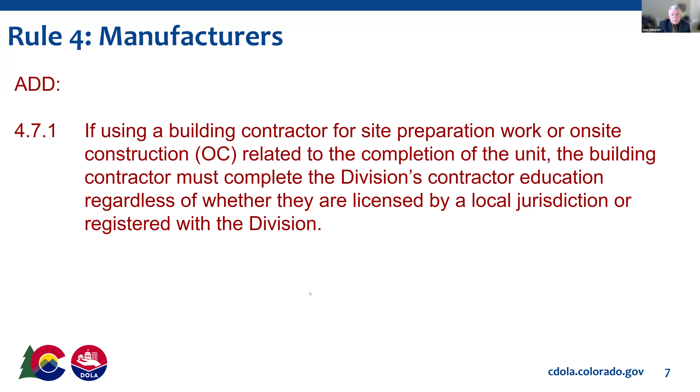And this will tie back to the responsible parties section also. Now, as promised, I've worked on some of the enforcement rules also, and so we're rolling these out for the first time also.

We've heard over the past few years that the process was not very clear on how this worked. We've also talked to our Attorney General representative, and they recommended adding some clarifying language, and we hope this makes sense to everybody.

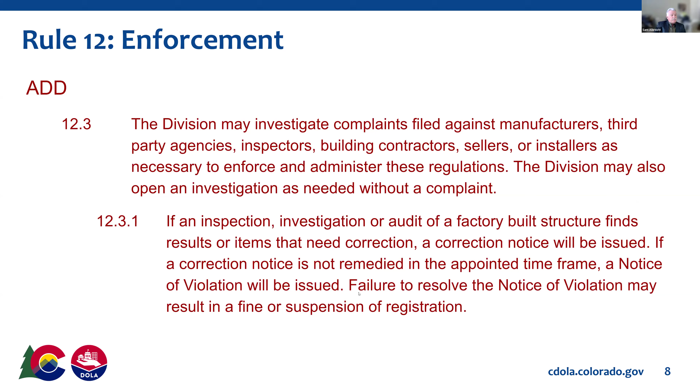So a little bit of a repeat, but if you go back to the 12.3.1 rule, this is really talking about an inspection, investigation, or audit of a factory-built structure. And then we talk about the plan review or screening, and this captures all the registered parties that we have in our program. And then if that corrective action is not remedied, then we look at taking it to the next level.

And that's really all the updated rules we have going into the next round of red lines. Any questions on what I've talked about so far? All right, thank you.

So other updates. We held a manufacturer's webinar on, oh my gosh, what was that date? January 20th, I believe. What we did there was we kind of rolled out what we were thinking with the regional design criteria or the design criteria regions and started asking some questions. We had pretty good attendance. I don't remember the actual number, but it was in the 40 or 50 range. And then we followed up with a survey right after that to every manufacturer email in our database.

We were asking questions about how does this layout look to you? Are there any price breaks we need to know about? What's going to be your cost update? Do you have any concerns about updating the 2024 code set? We also asked a question about Class A shingles on roofing. Anyway, a whole series of questions. We got 9 responses back.

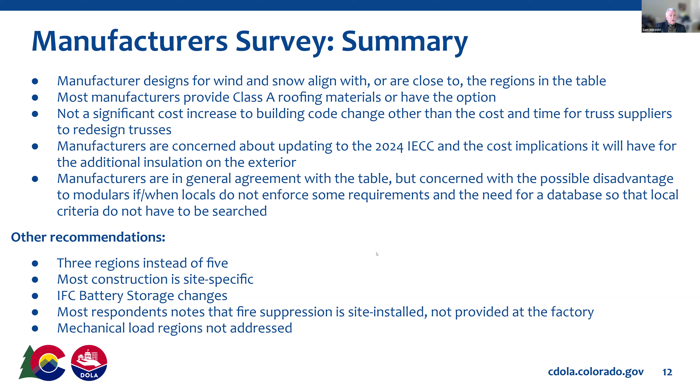All right, so as we work on Tracy's question, or her calling back in to get the question again, we'll keep moving. So thank you all for that discussion, and like I said, I appreciate the manufacturer's input on that. So let's jump into the design criteria regions.

Sean, you put a question in the chat too: would a factory be able to submit original plans with optional or alternate kitchens, bedrooms, and baths so they can be built without resubmission? That is not something we have discussed yet, but if you want to come online and talk a little bit about that, that would be worthwhile.

I would assume that the structural loads would all be the same, regardless of where they're going through, but that might be a possibility. I don't want to commit to it till we've had some thought about it.

Yeah, well, I mean, a lot of times the factory will design a floor plan and they'll have like a...

Can you hear me, Sam? Yeah Tracy, I can hear you, Sean. Tracy, I had to mute you again, this time we were getting nothing but echoes. So if you've got two devices logged in, you may have to mute one of those devices because we're picking up echoes.

Go ahead, Sean. Yeah, well, factories a lot of times will design a home that has a master bath that's very basic, and then they'll have an alternate, maybe a 5-piece bath with double vanities and stuff like that. And then they'll have maybe an alternate kitchen with a different island, or they'll offer it with a 3-bedroom and then make some slight modifications as a 4-bedroom by maybe making a family room into a 4th bedroom.

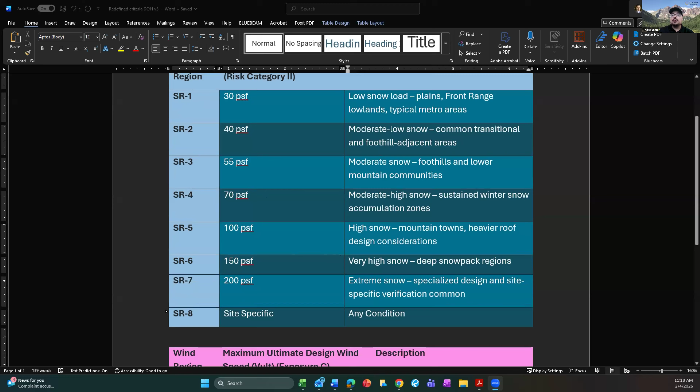So we developed this model that would capture more of that, just solely based on the data inputs that we received. We also then representatively created a second model for wind, in which we had 4 categories. Again, this was just to take what we got in terms of data capture, which was an imperfect model.

There's still a lot of the state that did not respond to the survey, and a lot more information to be gotten. But generally, I believe they're representative of a lot of the numbers we would anticipate, and a lot of what Donnie's research has already shown, and a lot of what came out of our meeting with ASCE with Jeanette Torrance about her expectations regarding the data we'd be getting back. So based on this, we wanted to present this to say, hey, we are thinking about other models.

We've been thinking about some of the ways we might categorize this information or use different stopping and starting points. If this is of interest, we can pass that along. I wanted to make sure we talked about this with the context it needed, instead of just being in the packet and presented as a separate model. So I'll stop the share there and go back to a bit more of the general context of why we created this.

One of the things you saw there was the wind region and snow region broken up as two separate tables with separate coding systems, again to address that issue of administrative feasibility. That has actually been adopted and integrated into a later version you'll see. But we found this thought experiment really helpful in terms of looking at how this information would accurately reflect what jurisdictions are doing in practice, and how we can align that from the outside in with the model you'll see from DOH. So that's been one of our major focuses.

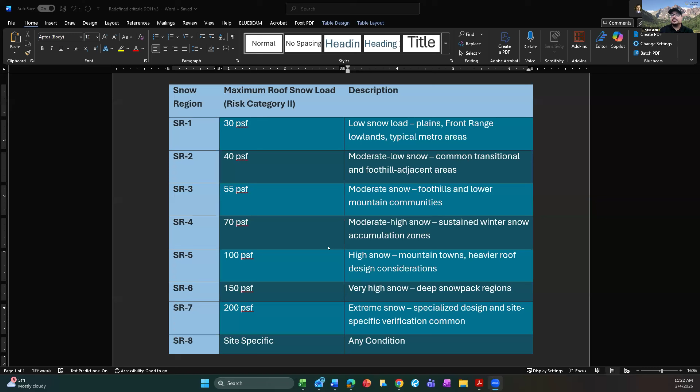No, so what you see here, the blue is a snow load, or snow region snow load matrix. No, you're fine, it's a fair question. What this is saying is, hey, your maximum roof snow load, just like it's been proposed to you in the table you've seen previously as the model here, this would be the maximum category you could build here, so 30 pounds, 40 pounds. What we did in looking at the data is take more of a logarithmic expansion of those categories, where instead of doing increments of 20 pounds, we looked at how we could capture more of the tail end of the data. But obviously to its detriment, this becomes more administratively complicated as you get up to around 8 different regions to administrate. So this is specific to snow load up at the top. Wind load, or wind region, we looked at the same thing. We looked at data we were getting back from our jurisdictions. The vast majority are using 115.

Okay, as is typical, that puts them less than or equal to the 115 range for that WR1. And that capture rate represents, I could pull the math on it, I think it's like 79% of all jurisdictions that we surveyed. So the vast majority of the state would fall into that one category.

129 and 155 become actual breaks in either wind contour maps or in adoptions that we've seen specifically. So a lot of folks get up to 129, they don't make the jump to 130, and there are reasons behind that. Again, up to 155 represents kind of that high end of an ASCE contour map. So we just use different data points to inform the table, but conceptually the table works the same way. And what we ended up with is being able to say that we could reinforce the model. Conceptually, the model that DOH has been working with makes sense for the end result here. This is just another way of looking at how to tier the data.

Are these going to be shared with us? Have these been shared with us already? I haven't seen them, I'm just curious. They have not. I finished this at some ungodly hour of the morning last night for some last changes to make it a little bit more clean and readable. So I'm happy to pass that along if that's of the request here. But I also wanted to speak about this and make sure I can contextualize this, that this wasn't meant to be a replacement model, but to kind of inform the decisions we'd already been making.

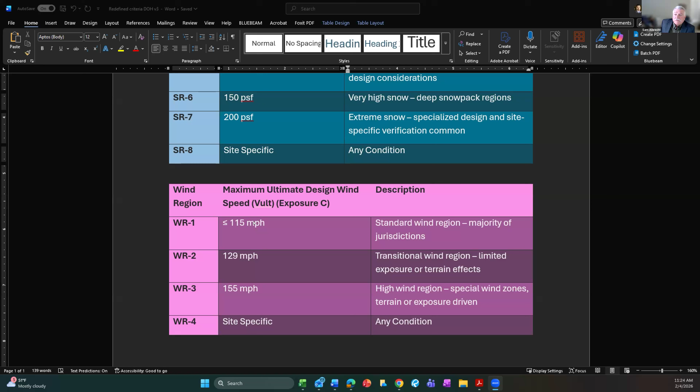As we get into our design criteria regions, you're going to kind of see what the table is that we've shared before. And then I know we did a summary by regions at a TAC meeting or two ago. We can pull those slides out for you also, I think, and make sure you've got those, Tracy.

Thank you, Andre. Any other questions for Andre?

If the TAC members like some of the stuff that's in Andre's chart, we've already incorporated some over into the chart that we're getting ready to show. Some features of it. If you want more regions, let us know. We've heard from manufacturers they like less regions, but we think that was not a very deep dive into what the manufacturers thought as far as price built on the cost of production on 3 versus 5, but it's certainly something that we can talk about, or 8.

Tracy, you got your hand up again? Do you still have your hand up, Tracy? All right. Sorry. That's okay, thank you.

Okay, so just to go back, the whole reason why I had asked that question earlier, and I appreciate your response, Tim, was I might not have engineered trusses for a tiny home, but I'm always working with, let's say, 8 feet wide. It's very, very common. We may have models that might be, let's say, 30 feet long, 8 feet wide. So our girders have already had engineering behind them, and we often use the same pattern over and over again. Same thing with our designs. That's why I asked about the door and the window, right? Like we're not going to put a window on top of a girder, but I understand what Tim's saying.

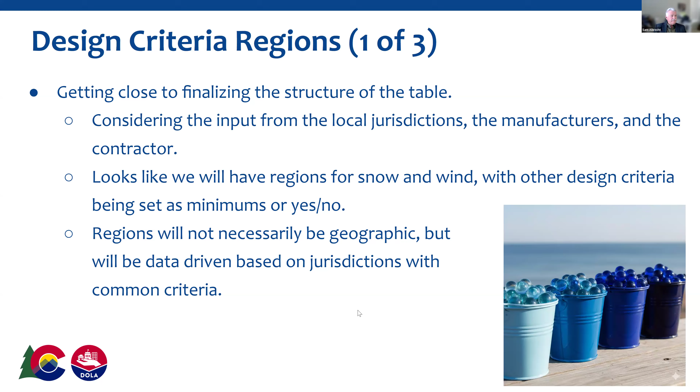This next slide—we're going to push to get all the local jurisdiction data, even from non-responsive jurisdictions, because we don't have it all now. As you heard from Andre, we had about 120, 130 responses. That means we're about halfway there. So we're going to be diving in and trying to get that.

Shums Coda is going to help us come up with design criteria for unincorporated counties, areas that do not have building departments, and some other jurisdictions that don't have building departments. We're going to just have to pick a number and go with that, so we'll have their involvement in that. But all jurisdictions will have a home in the final table, even if it's 1, 2, 3, 4, or site specific.

For wind and snow, for sure. It's interesting that unincorporated Ouray County has published roof snow loads from 24.5 to 200 pounds per square foot, and that gives you a perfect example of why it's difficult. Now, in the table we're considering developing, that would put Ouray County in snow load regions 1, 2, 3, 4, and 5. They would have there.

And it's interesting also, as we started pulling this data, that a group of local jurisdictions are no longer publishing snow loads. They're saying use the ASCE hazard tool for calculating the loads. And that's a challenge too, because we look at Elbert County—we've got a little bit of the Palmer Divide in the southwest corner of the county, and that's going to be different than down in the southeast corner of the county as far as snow loads.

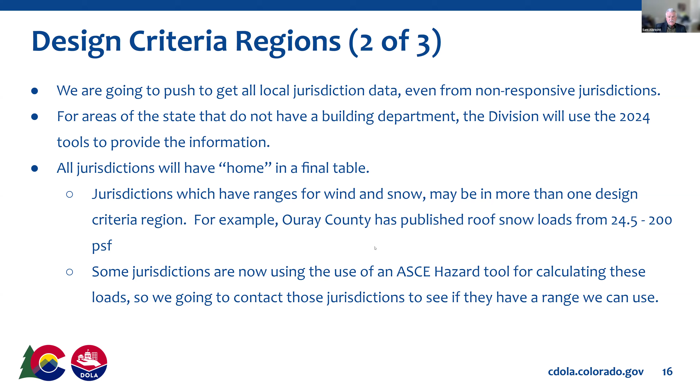But there may be some jurisdictions that we go out and talk to, and say, would you accept a range that we can publish, or a snow load—for example, in Elbert County, instead of it being a 40-pound snow load, maybe it's the 30-pound snow load, maybe it's 40 or 45, and then everything underneath it would be acceptable in the county. So that's the type of issues that we're going through.

There has been discussion and concern about allowing jurisdictions that may change their design criteria with code updates, or moving their design criteria into different design criteria regions. If somebody's still on the 2015 or 2012 IRC and IBC, and they may go to use the ASCE hazard tool update, we're going to find a way to incorporate those.

I'm recommending, and Donnie and I think Andre are in agreement, that the division develop a policy and procedure outside of the administrative rules to better accommodate changes. I don't want to tie our process for changing where jurisdictions go in the design criteria table into an administrative rule, because then modifying it drives an administrative rule change. So a separate procedure outside the administrative rules is the best way to accommodate this.

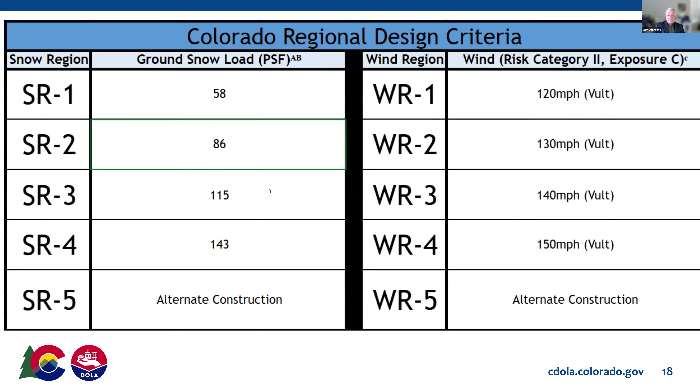So that's what we've got for wind and snow. This is the other design criteria, which I went through real quick, but I want to pause here and see if there's any specific questions.

Donnie, Tim, you got some questions on this? Yeah, thanks, just a quick question. I know you mentioned when you had this up before under the wildfire, where it says minimum class 1, which was discussed quite a bit in the last couple of meetings. And I think that footnote says unless it's not required. But I think you mentioned that if a jurisdiction required a 2, it should be the higher in areas, or maybe throughout their whole county. Would that make sense to have that in that footnote too, or is it, maybe I missed it on the footnote?

Footnote E may be exempt if the Colorado Wildfire Resiliency Code map or locally amended map approved by the code board classifies the location where the structure will be installed with no hazard. But yes, we should add there it could be 2 if the map requires it.

Thank you. Well, yeah, so just a clarification, the table itself is just a minimum. So if you're designing like a mass model type, you can't start lower than that 1, right? But remember, the product itself has to meet the local design criteria. So I guess we can still clarify it, but it's assumed that if it goes to a jurisdiction that is a 2, it meets theirs. Just like if it goes to a jurisdiction that requires fire suppression and doesn't have it, then it can't go there, right? These are just the minimum requirements.

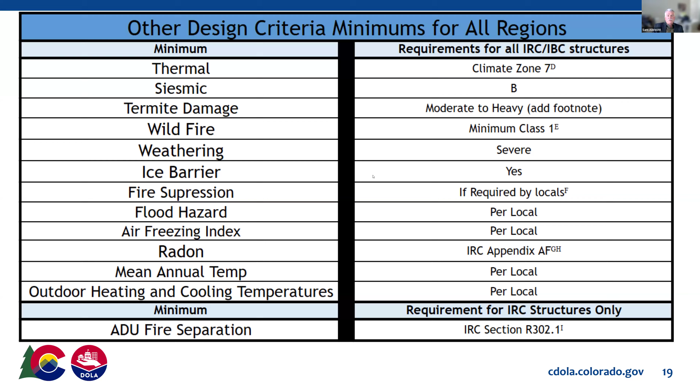Footnotes, Donnie, anything in the footnotes that you wanted to call out? No, I think I'll run footnote B with Justin a little bit more and just make sure that we get that clarified a little bit better, the explanation of what the ground snow loads are. And then I think everything else is set for now. Okay, any other questions or discussion on this?

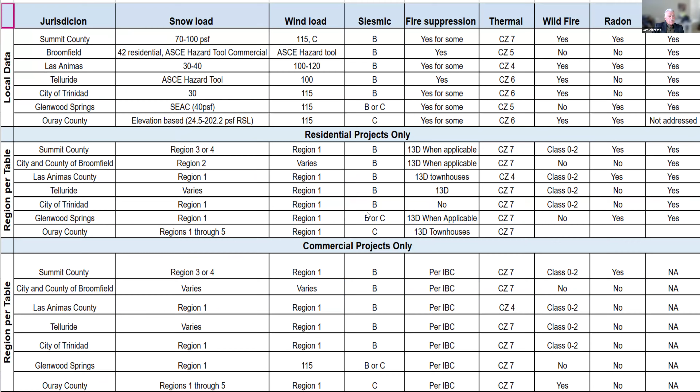We're at 12 o'clock. I want to get to a quick discussion on the 21 and 24 IECC energy code. Any other questions on where we are with this? Okay.

So the other thing we heard both from manufacturers and from Shums Coda and from Donnie was discussion on 21 versus the 24 IECC. And we've had several meetings on it internally. We brought in Hope Medina, who is the energy code expert for SCEA. I had a really good discussion with her.

So there is an option, I guess. I know we had previously discussed moving to the 24 IECC, and there's certain advantages to that. I think there's also some advantages to staying on the 21 IECC. And so that's kind of where we are. Wanted to throw out to the TAC if there was strong thoughts on this.

If we stayed on 21 IECC, you can build to climate zone 7 for all areas except climate zone 4. Going to the 24, we may have to look at different design criteria regions for either 4, 5, 6, or 7, or maybe 4 and 5 together and 6 and 7. There's a lot of changes in that 24 IECC, and we talked to Robbie Schwartz too in detail on this, and he gave us some great ideas for clarity.

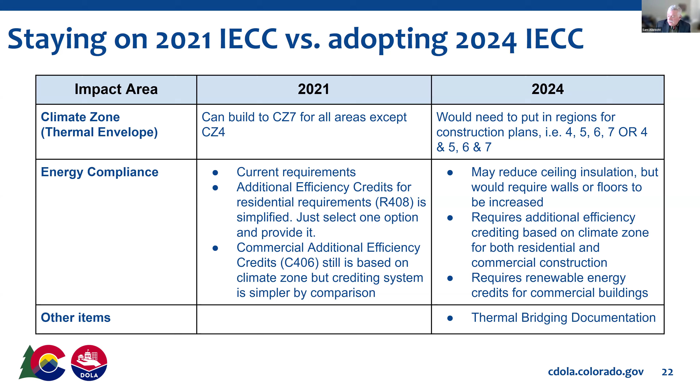Okay, all right. If you need to sleep on it, shoot us an email in the morning, please do. We'll wrap this up at the next TAC meeting. With that said, we're at the wrap up.

Just to give everybody the schedule, March 11th is when we're going to have that comprehensive draft. March 18th will be the final meeting for the TAC to discuss and finalize those proposed rules, and then we get into rulemaking. We're going to start our interested parties meeting also in February, so we have the opportunity to hear from all interested parties, and we'll keep the TAC advised of when those meetings are if you guys want to listen in.